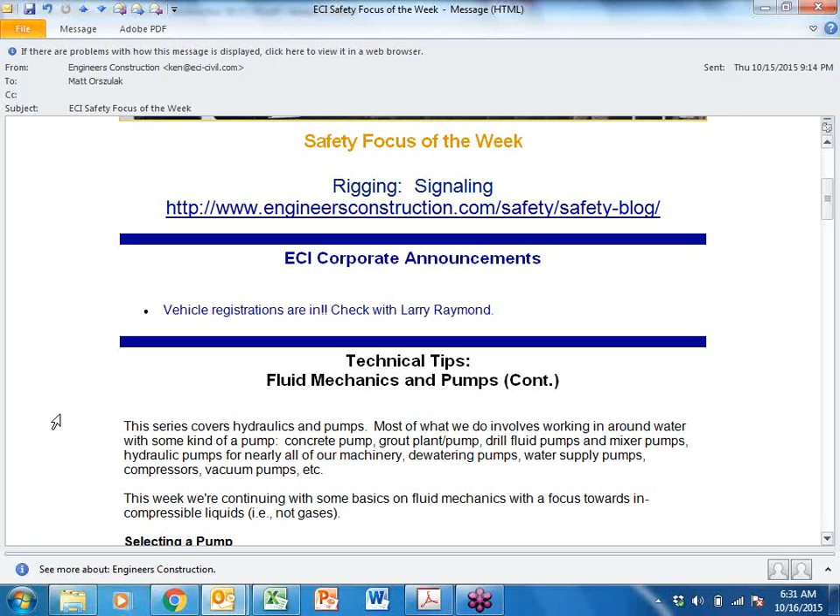One thing I haven't included, I'll start including here, is a reminder to start winterizing or thinking of winterizing. Maybe this weekend even is supposed to get cold. So I would say anything with water in a small quantity especially. I don't think big tanks and everything are really a problem, except maybe in the valves, but all the pumps. All the pumps, certainly. Pumps are an issue. So keep that in mind. It's going to get more and more important here.

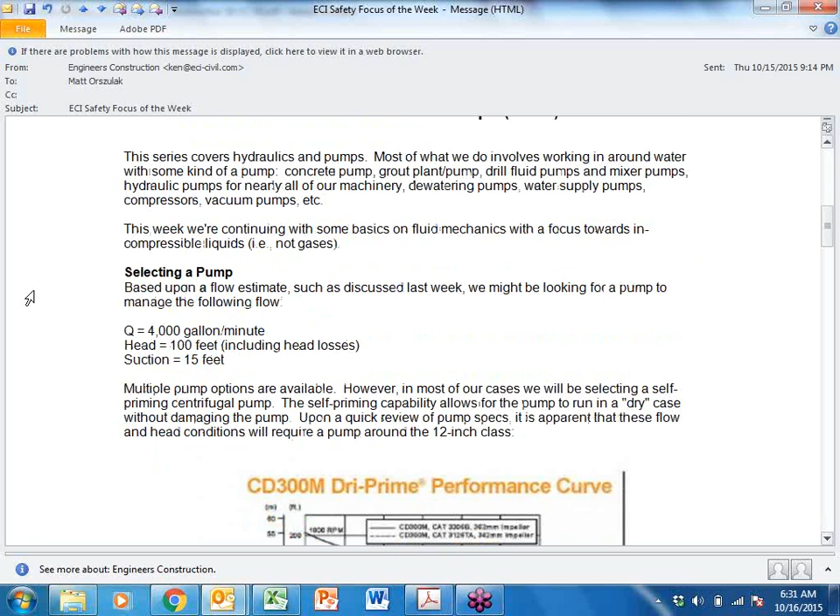Technical tips this week. Again, we're talking about fluid mechanics and pumps, actually, selecting a pump this week. We've talked all about flow and head and everything, so now we have a little more sense of volume, what volume is, how it's measured. Let's say we had that case last week where we had flow through a stream and we could estimate, based on the height and width and the speed of a twig flowing through, what the volume is. I made up a new number that's a little more practical. So how do you go about deciding how to select a pump?

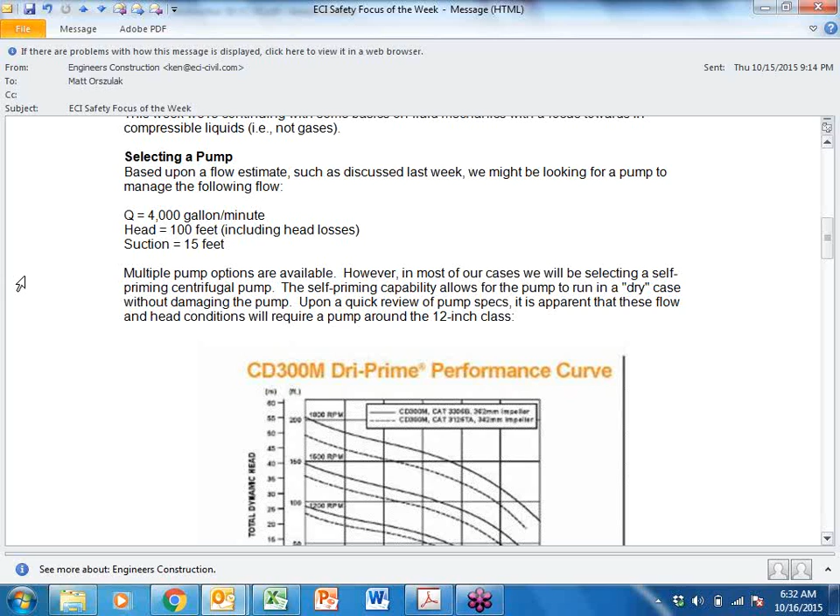In this case, I have 4,000 gallons a minute, and 100 feet; we're going to pump it right up a pretty long bank, but that can include your head losses. As we discussed last week, as things flow through a system, they lose some of their energy, and we have to make up for that in the pump selection. And sometimes, of course, we're sucking it up. If it's a submersible pump, there is no suction. It's in the column of water. It pushes it all out. But non-submersibles obviously have to suck it up into the pump system.

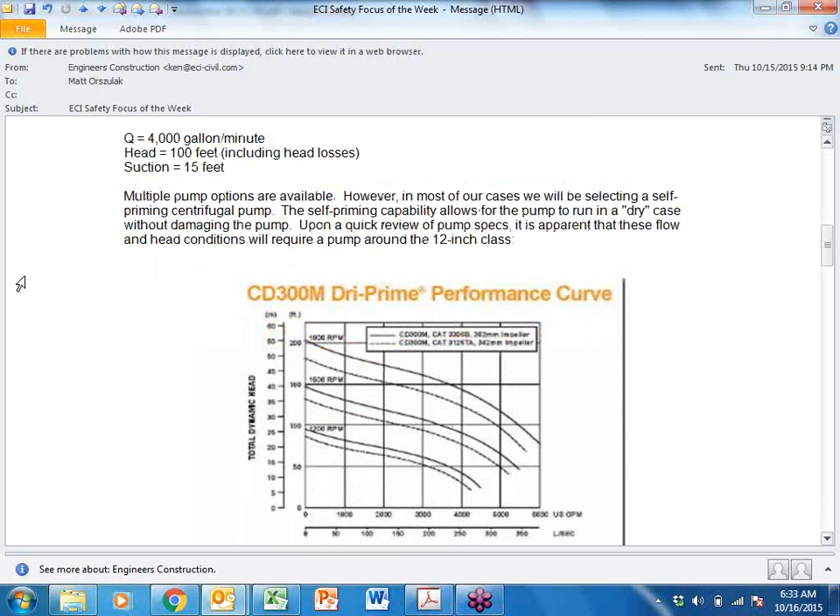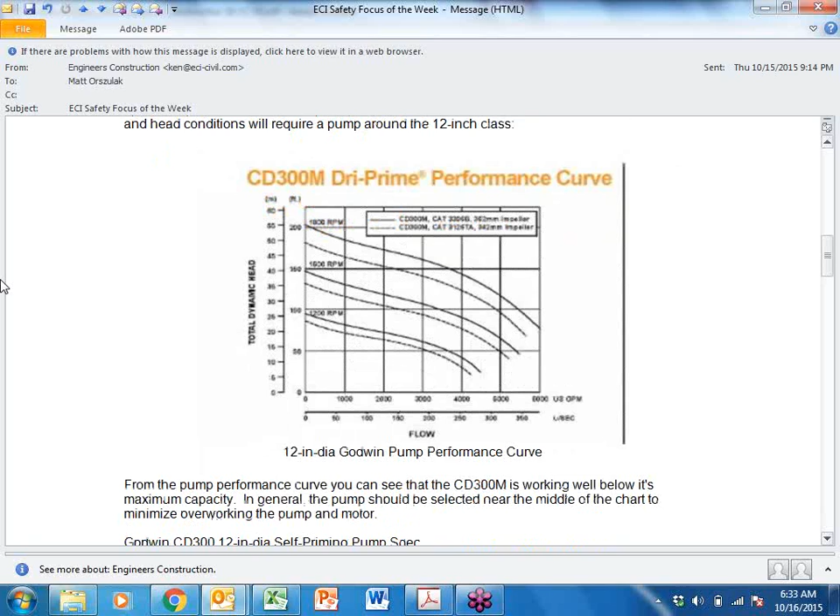So there's obviously a lot of pump options available. In the case of pumping at that kind of volume where you have suction especially, we would think of a self-priming centrifugal pump. The self-priming capability allows us to pump in so-called dry case, which I want to talk about a little more, without damaging the pump. And then you would find that these size flows and head requirements require something like a 12-inch pump. This is from Godwin Pump for a 12-inch diameter on their performance curve.

We'll look where we have the head of, well, this is meters. Okay, it's hard to read on here. There's 100 feet, and flow right around 4,000. They have their chart set up for different RPMs on the engine. The idea behind picking a pump is not to go, oh, look at that, we can get out there to 6,000 at 70 feet, 75 feet, because you're going to really tax everything and you probably won't have a successful dewatering system. So you want to pick something back in the mid-range, maybe the upper beyond middle range.

So 4,000 here and 100 brings us right to here. So we'll be running a little more, and it looks like 1,600 RPMs. And of course, we've selected things conservatively, so hopefully we're working on this side of the curve. But you certainly don't want to be picking at the limits of your curve, just like picking rigging. We don't want to pick a shackle good for 8,000 pounds if our load is 7,950.

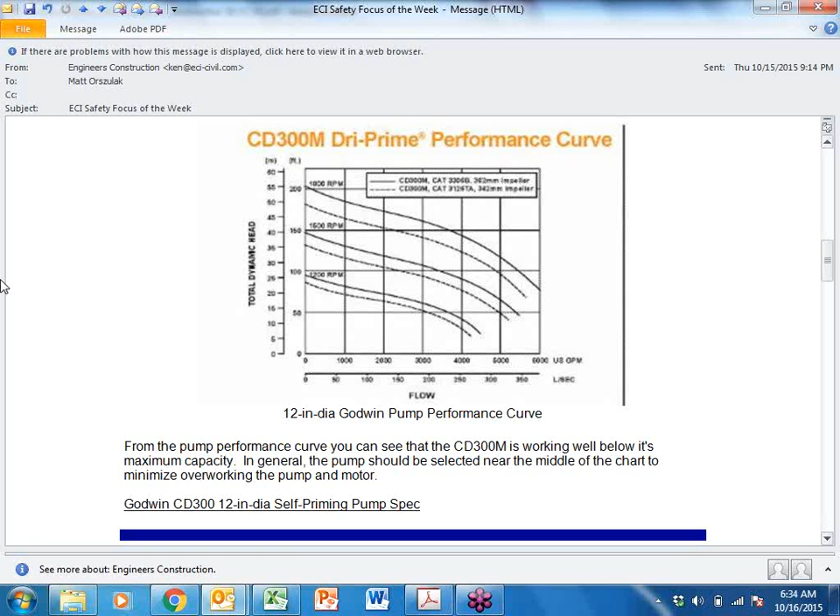A lot of those pumps too, they lose their prime if you suck it down. And even the self-primers, you get some static up there, so it builds back up. So that was an important thing. Well, let me just finish this. From the pump curve, you can see that this pump is working well below its maximum. In general, that's where we want to be. Now, the point about self-priming pumps, you have to have water in there to start with.

You don't just drive up, especially this time of year, if we've drained the pumps because it's potentially going to freeze overnight. You still have to get water in to prime the system. But a self-priming pump, if it's running, you wouldn't have to winterize it, because if you've got it attached to the water, and even if it's sucking air, it's got water in it, it's stirring up the water.

But you can't run a self-priming pump dry, meaning totally without water in the system. That will burn it out. And I did attach a link to the spec.

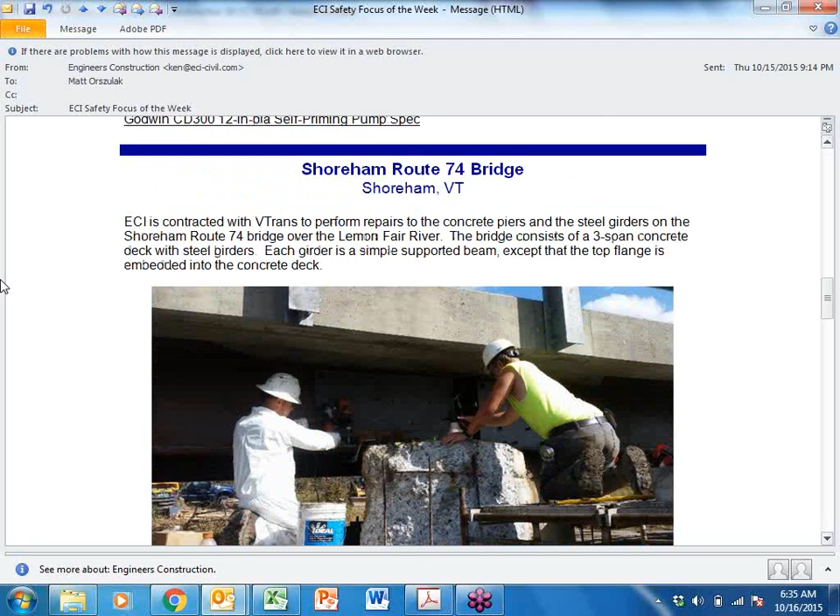So for this week, I'm going to talk about, on projects, the Shoreham Route 74 bridge. We're contracted with VTrans to perform repairs to the concrete piers and the steel girders on the Shoreham Route 74 bridge over the Lemon Fair River. The bridge consists of a 3-span concrete deck with steel girders, and each girder is a simply supported beam, except the top flange is tied in.

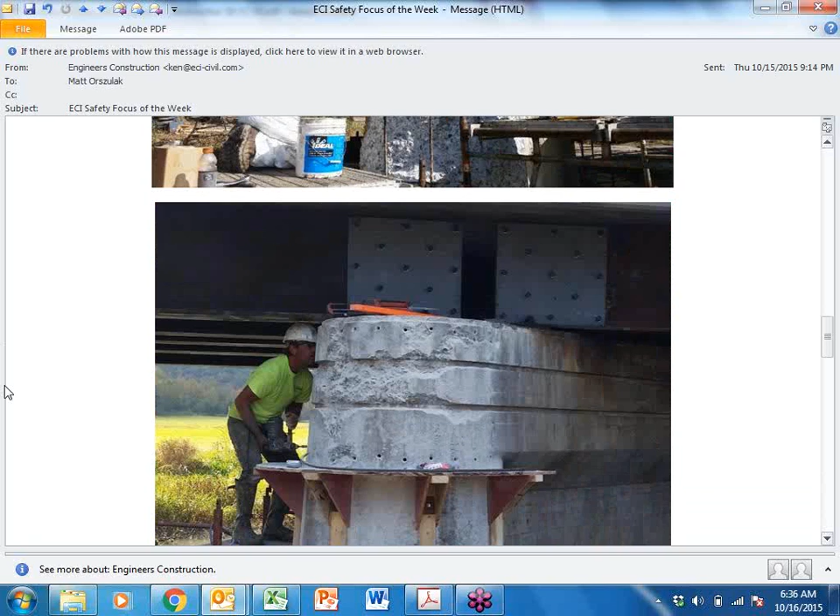So you can't really see. I think the next picture you can see what I mean. Well, I guess you can. Concrete pier, and the girders come in, and they're not attached. However, they're attached to the concrete deck, so they're kind of attached, but they're not truly a simply supported beam, so that theoretically this one is working separately from the adjacent one.

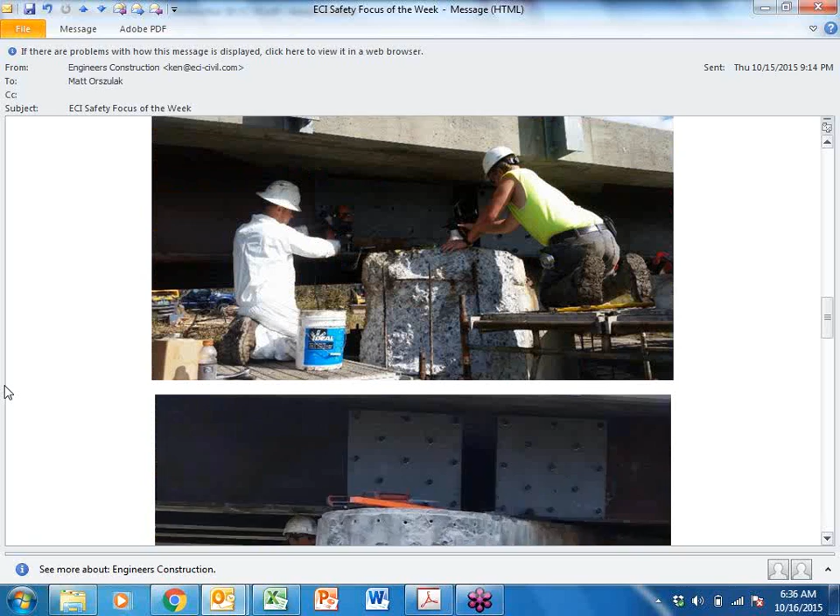So the pictures here show us, actually we're mag drilling. It's hard to see in the picture. Mag drilling some bolt holes for new plates, and we're attaching plates to the ends of the girders around the bearings to stiffen up and to reinforce the web.

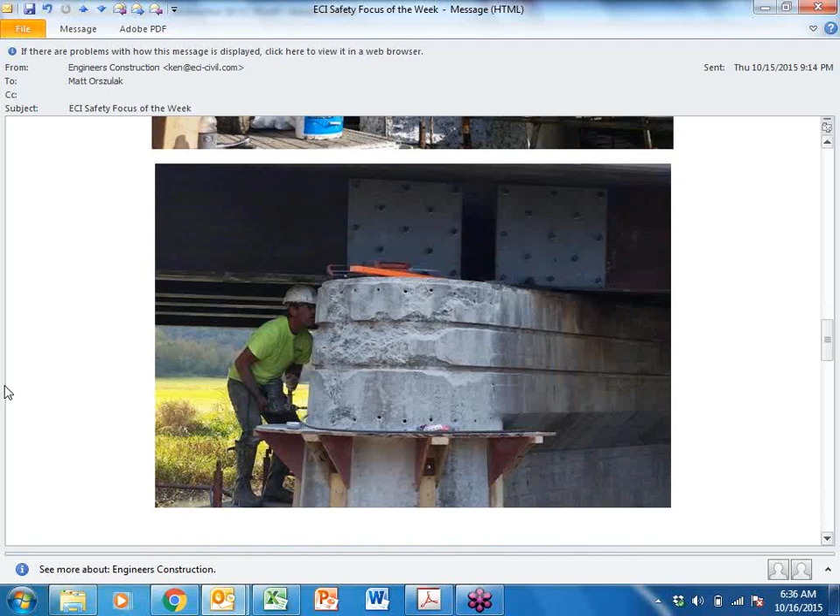On a beam, the load is transferred into the web in shear, so it's holding that up. The load is on there, and that area is highly sheared. As you go away, the shear typically reduces because of the loading, and then you start to get bigger moments. So your flanges are working away from the support. At the support, it's all about shear, which transfers through the web.

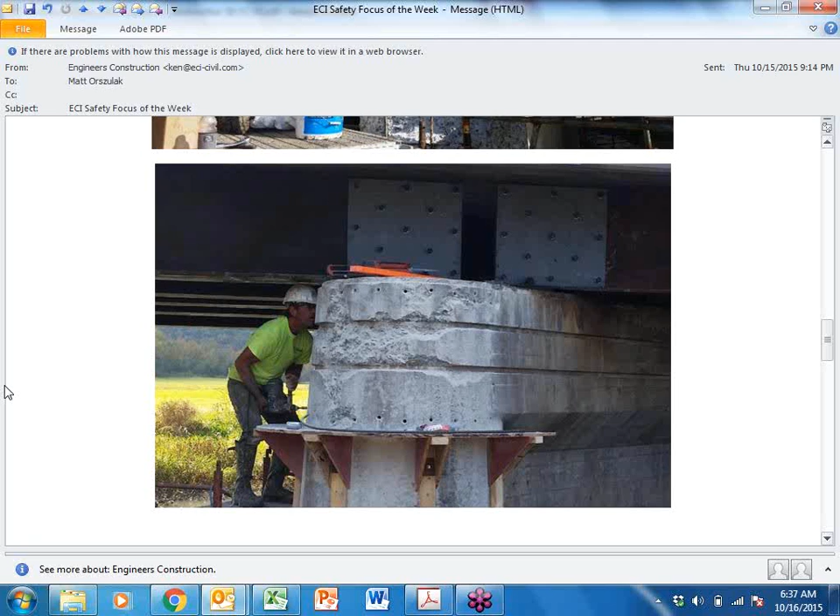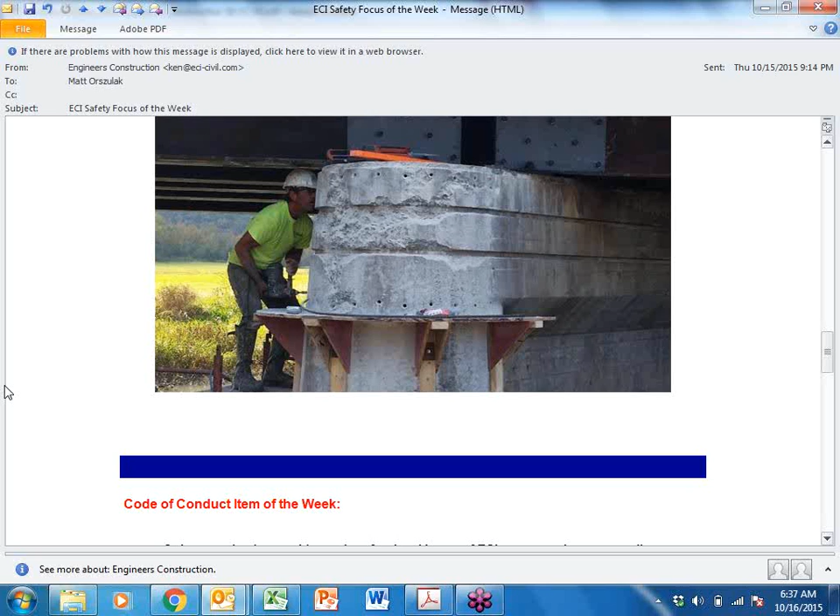And did anyone else think that was kind of an odd photo of Paul Brunton there? Or just not sure what he's drilling holes. Yeah, he's got the right posture on, I guess. Right, doesn't he? Got the right pushing with his legs, it looks like. So that's what I got.

The blog primarily gives you a link to some hand signals for crane signaling. And the point that I made here is that it's important to have those signals and know them and be doing the right signals and being coordinated with the crane operator. The hand signals in this OSHA link are pretty much what you use for a crane.

Excavator use is different. Even though it's lifting, you're not hoisting with a cable. Basically, the operator is lifting the machine. So my example about why it's different for an excavator is because if you were telling a crane operator to boom out, he would boom out. But if you're talking to an excavator operator, there might be cases where you want him to boom out, but what are you talking about?

The dipper stick, the boom, it's all an articulated configuration. So you just tell him to lift up, and he knows, and he's got the feel of lifting up. So he's got a different level of control over the stick and the excavator than the crane operator has, who does more simple single-direction moves, which the signal man can control.

And like I said, I had a link which I'm sure Matt's going to show us more on, a link from OSHA of all the hand signals. Okay, Matt? Yeah, those are all the approved signals. We'll go over requirements for crane, but also just for general purpose. You can use some of these for just spotting and things like that.

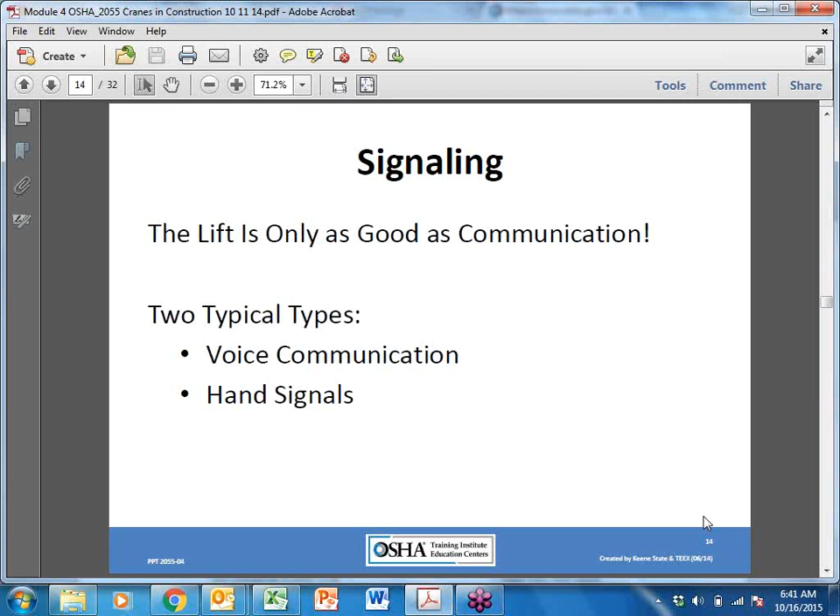We're going to go over the hand signals. I got a short video we'll watch on hand signals, and the other one, and the more preferred method, is voice. It's really direct contact with you and the crane operator. It's a better technique if we have it, if we can get radios or the headsets we use in Rygate. So with voice communication, there's 2 types. There's hardwire, which we wouldn't really use, but of course the radio.

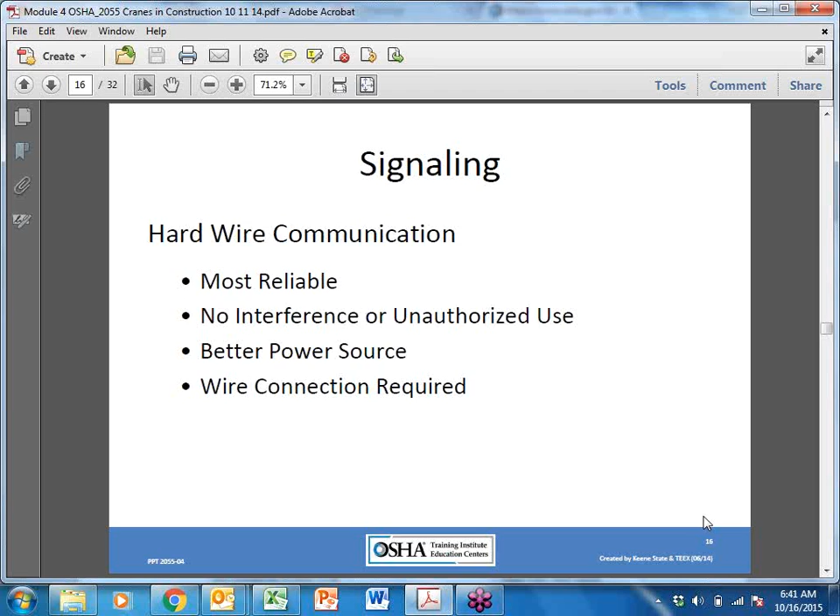And a couple things with the radio is we want to make sure there's no interference. We have direct contact. We don't want our crane operator and our signal person hearing the flagging operation that's going on the roadway. So we want to make sure that we're on our own signal. There's no interference. It's really reliable. And we always want to make sure we have open lines of communication back and forth between those 2 operations. Again, repeat commands.

OSHA likes to make sure we discuss the voice signals, if we're going to use boom, hoist, lower, whatever we're going to do. But they also like to see distance and direction. So if you want to have the crane operator swing 40 feet, Jim, swing over 40 feet, tell them 35, count down 35, 30, 25, 20, slow, and you can start slowing them down as you get closer, and then you tell them to actually stop.

A lot of times if he can see what he's doing, you don't have to go through this, but if he's blind, then you need to make sure you really have the proper voice communications. Function, direction, distance, and speed. That's what we really like to see. It's really open lines of communication where you're covering all your bases. And then function to stop. Test the equipment before we get out there. Ideally, it's hands-free for our operators, so they've got both hands on the joysticks and they'll be able to talk clearly with the people on the ground.

So hand signals, I got a little video I wanted to show here. But before I show the video, I'm going to show you the approved signals from OSHA, the ASME, the NCCCO, all the crane institutes out there. These are all approved. We can have our own signals, but we just need to make sure that the crane operator and the signal person agree. So you see a lot of this out there, this is a lot of times universal for stop. Well, this is not an approved hand signal.

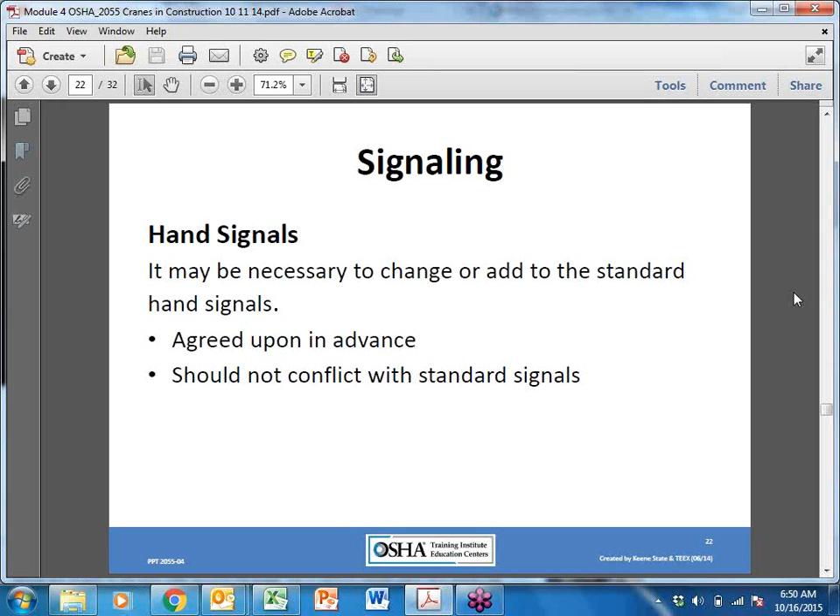Biggest thing is with the signal person, we want to make sure that that person stands out a little bit, so wearing maybe a class 3 vest or a different color hard hat, something like that, if there's a lot of people around. But again, make sure it's just one person. We don't want to have a million people. The same thing with your crane operator, with spotters, or your excavator operator. There should only be one person doing hand signals. We shouldn't have 4 or 5 people telling the operator to do one task, because there could be some confusion and miscommunication, and then there could be an accident or a utility strike or something like that. So make sure it's just one person out there.

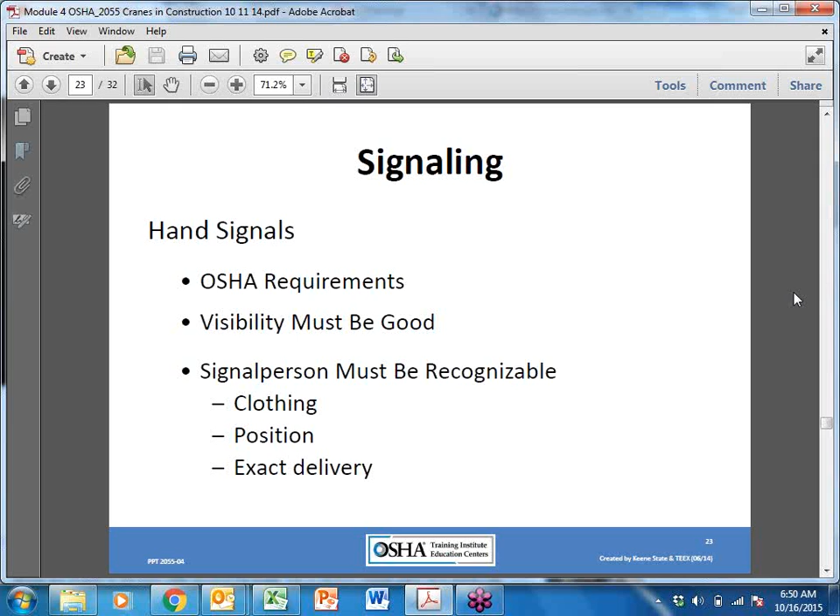Are there any questions? I think one thing that is reasonable for us to do when we're working with the cranes is just guide them to get the load off the ground and away from the guys. And then whether they boom up or hoist up after that in their turn is really more something the crane operators will know and be better at controlling. But most of our operations are just getting it up and then at the receiving end, getting it down in the right position. In the right place, yeah, I agree. Okay. All right, good.